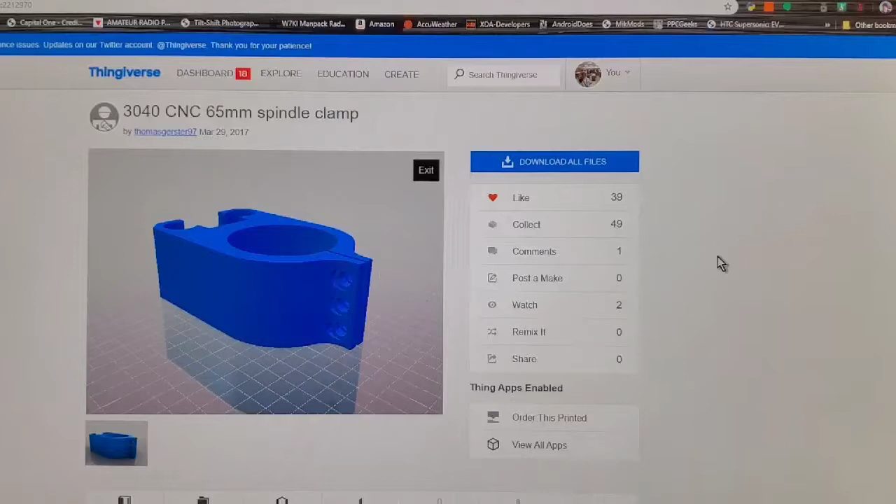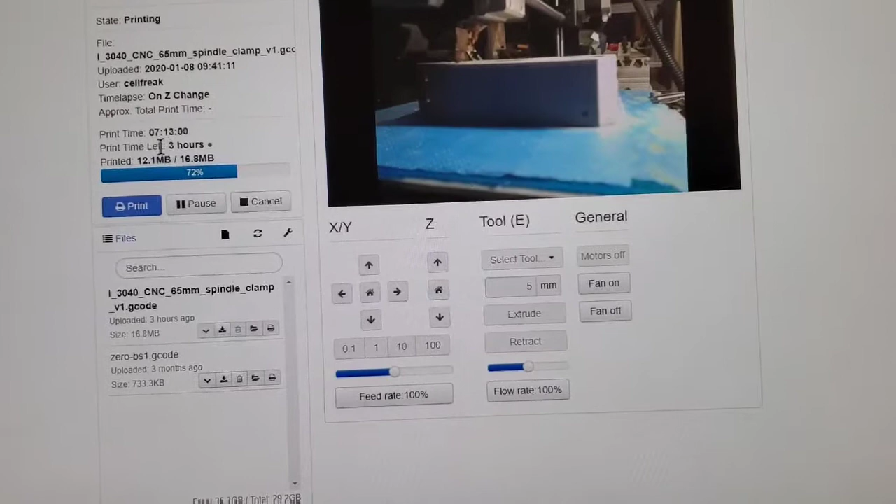So this is the piece that's actually printing right now. This is going to replace the spindle on my smaller 3040 CNC. Currently we are sitting at 3 hours left and it's 7 hours in.

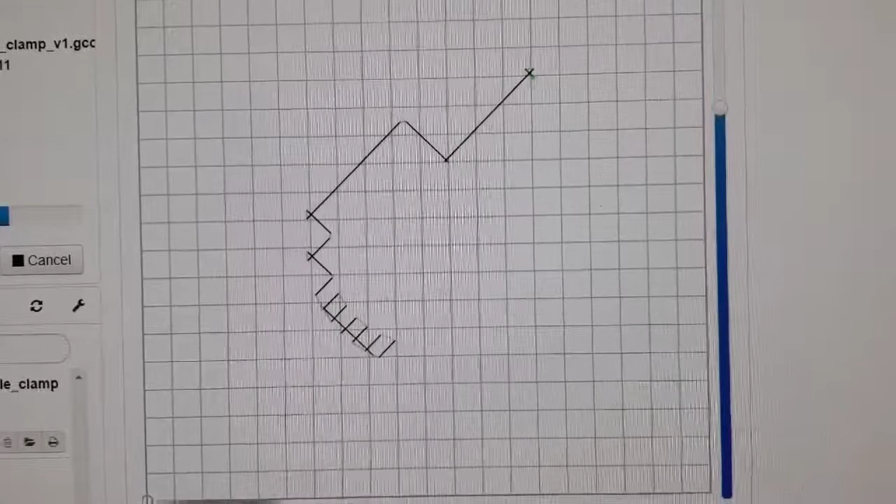And you can see what it's printing, that's the infill. Once it gets done with the infill, it'll do the outside walls, and then do the next layer. Actually goes pretty quick.

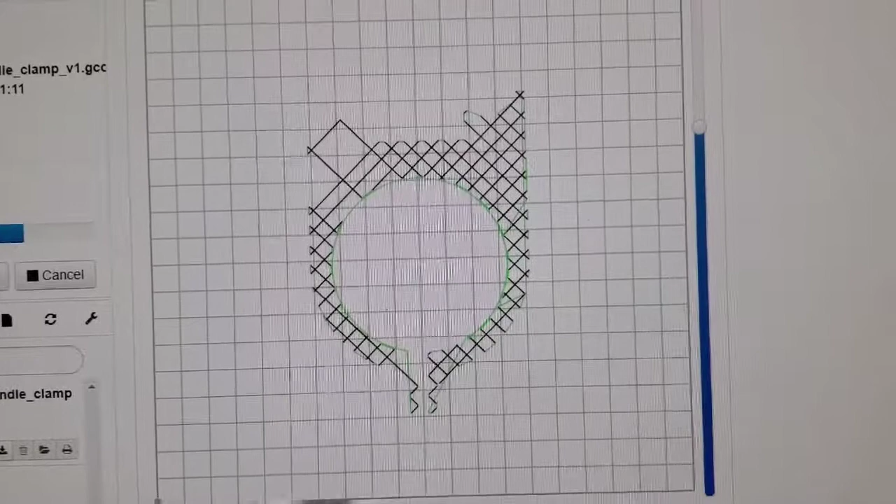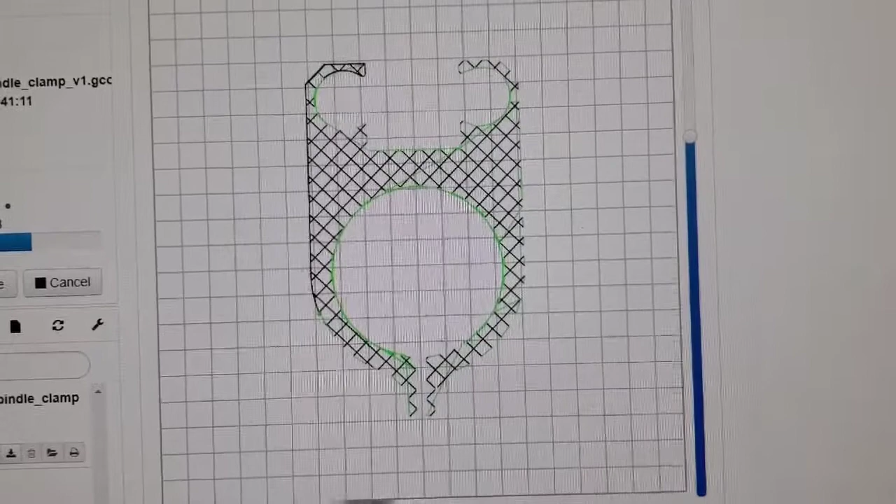Gonna make 2 faster passes around the border and then 1 slow pass. I'm sure you can hear the printer in the background. And that completes the outside.

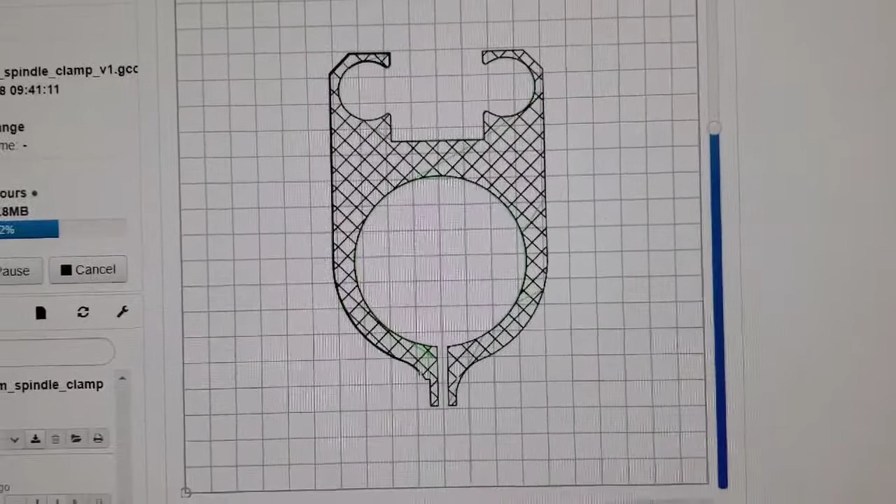And we'll take a look at the printer. This is one of my first few prints I did on my i3 printer. It's using 4 matrix LEDs and an ESP8266.

It does the time. The status bar across the bottom is a 3D print job I actually have going, and we'll go look at that in just a minute. I think this print was running for 7 hours, got 3 more hours to go.

It does show the date, weather, and then it'll also display the file name, and the percentage, and the Bitcoin value. When I first printed this, it was up to 10,000.

Like I said, the small status bar across the bottom, and then also the percentage that displays. And we'll be back looking at the job on the printer. And here's the print job running.

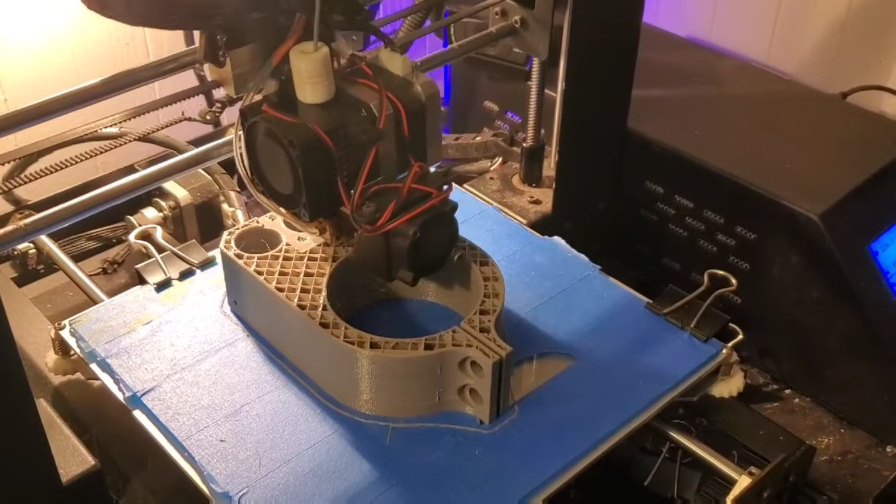What that's going to replace is this piece here that held the 500 watt OEM spindle. This is a 65 millimeter. I was planning on doing an 800 watt water cooled.

Come to find out, the Makita router is 65 millimeters. I took my calipers to Home Depot and measured it, and it'll slip right in. There'll be 3 bolts across the front, and there'll be 4 bolts that hold down the bracket that mounts onto the trapezoidal screw.

And be able to push this a little bit faster, and use my quarter inch mills that I have for my 52x82 CNC in the other room.